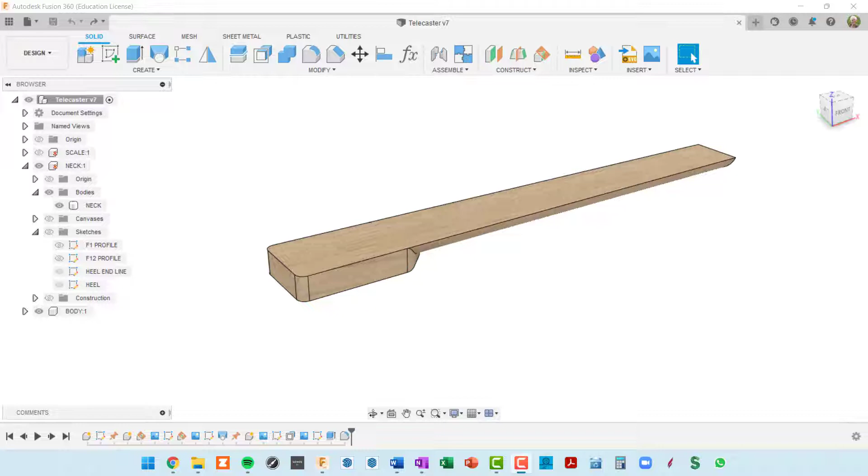In this video, we'll create a smooth transition from the heel to the neck in this area right here. I'm going to use a technique I call draped line lofting. This technique was pioneered by Brad Anderson, and I'll leave a link to his video in the description below.

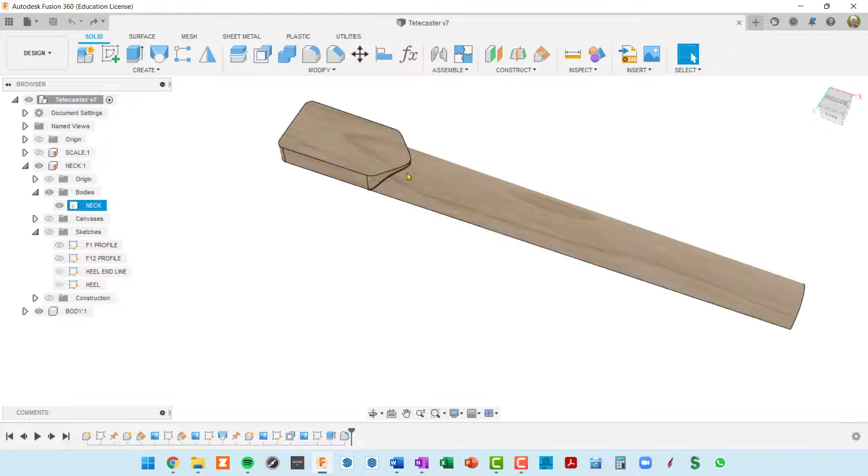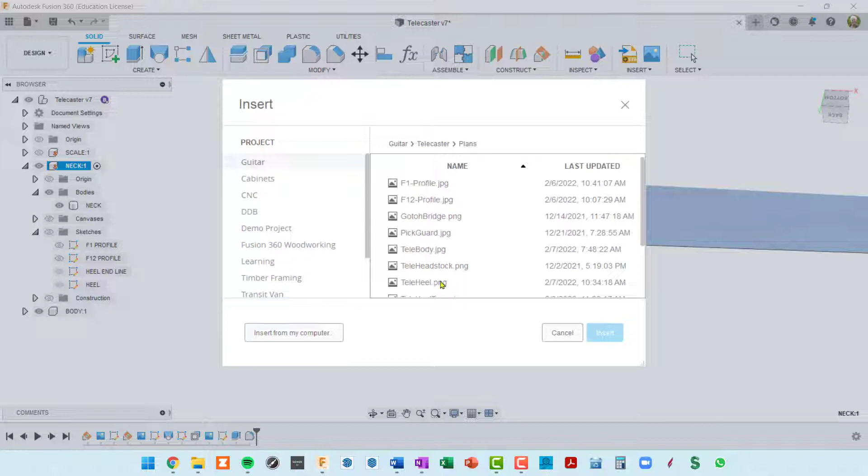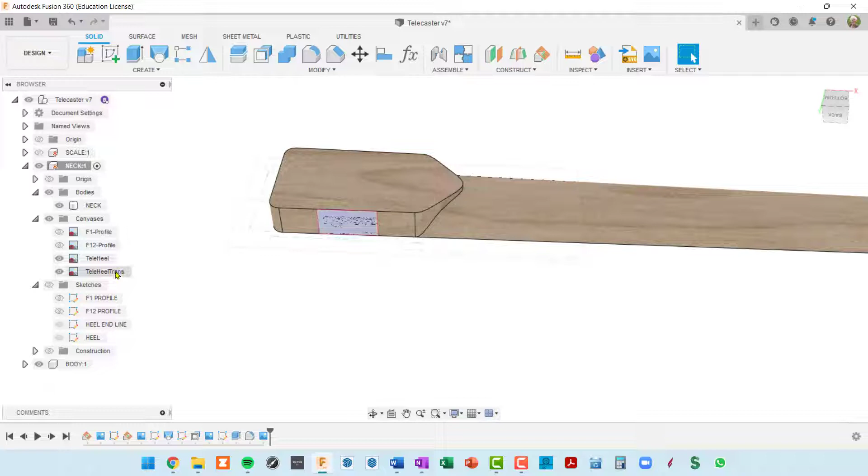The first step is to identify a transition point - where does this transition end on the neck? To do that, I have a piece of the plan as a canvas. I'll activate my neck component, go to Insert Canvas, find my plan file, Tele-heel trans, and insert it onto this plane. I'm getting an error that the canvases are hidden, so I'll unhide that and confirm. Now I have a new canvas, already named based on the file name, Tele-heel trans.

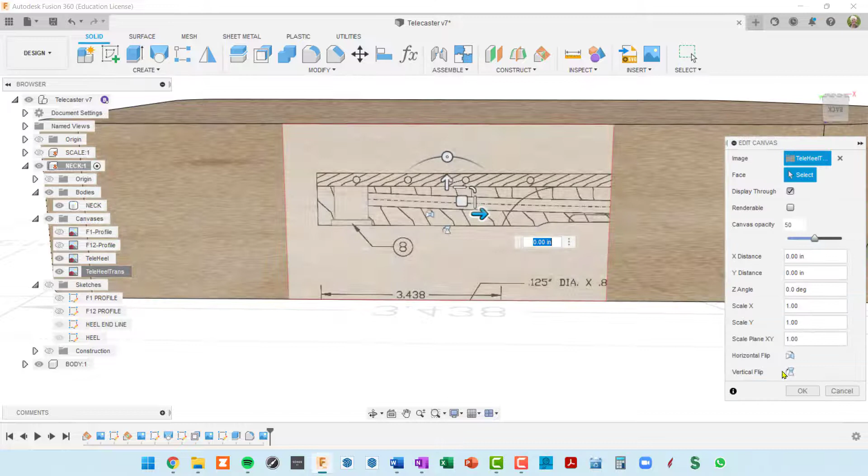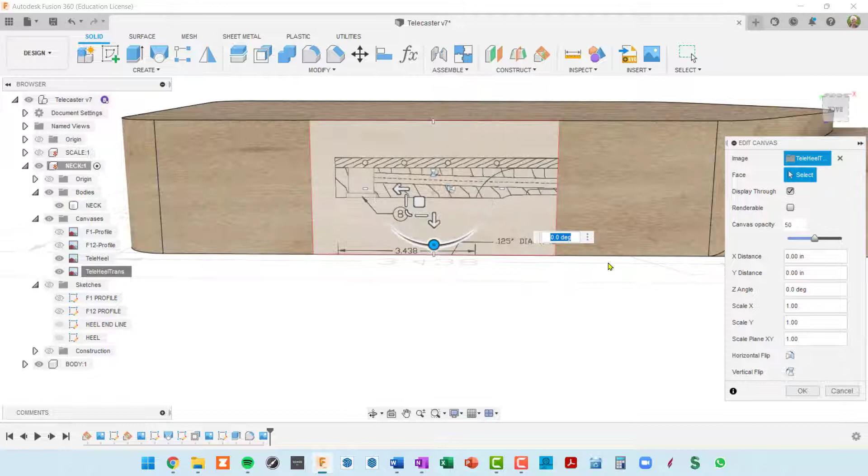Let's zoom in - you can see it's actually upside down. This is the top of the fretboard, and this is the transition area. So I'll right-click on the canvas, edit it, and flip it horizontally in the dialog box. Actually, I want to rotate it 180 degrees, then flip it horizontally - but that's now upside down from what I need. Let me flip it vertically instead. Okay, that's what I need - this transition area needs to match the heel.

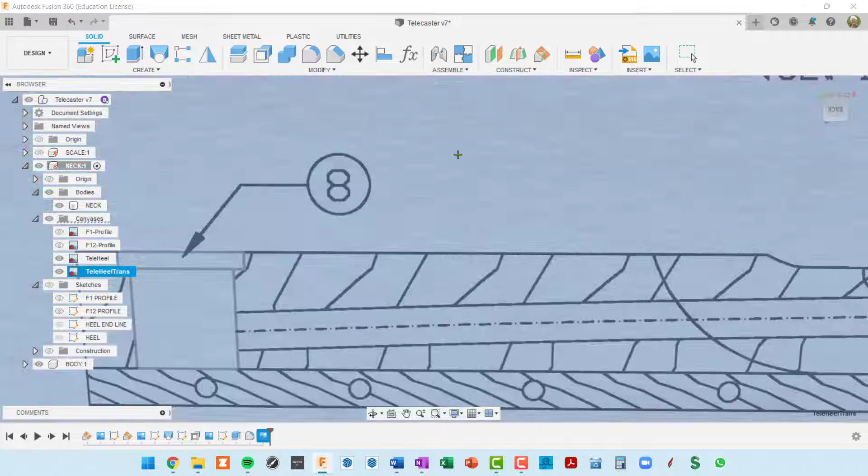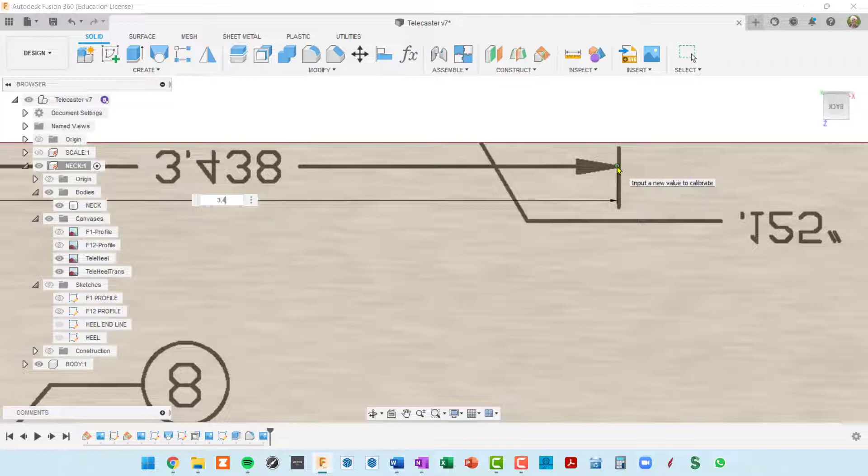The second issue is this is way too small. I'll click OK, then come back in, right-click, and do a calibrate. I purposely left a dimension in here, even though it's inverted and upside down - I can still read it, it's 3.438. I left that in specifically for calibration. So in the calibrate tool, I click here, move to the other end of the arrow, click there, and type in my dimension, 3.438. Now it should be scaled appropriately.

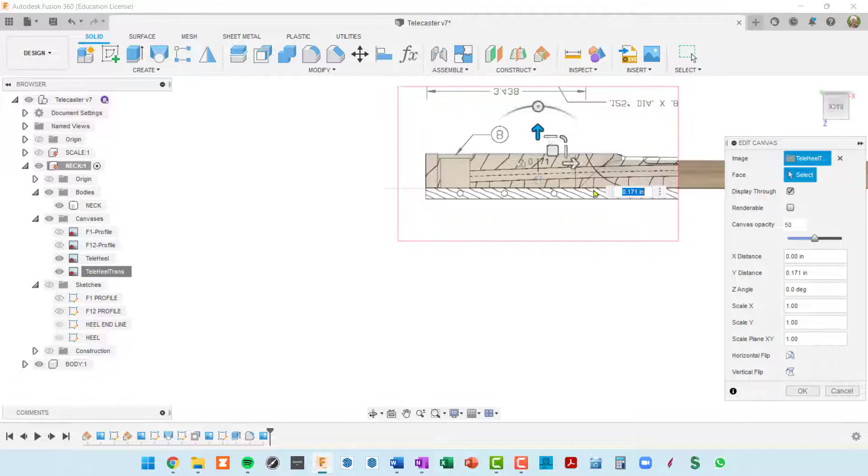Now we want to move it, so I go back in, right-click, edit canvas, and align it to the end, then move it vertically. Keep in mind we have a fretboard on top here, so I'll align the bottom of the fretboard to the top of the neck. Now you can see we've scaled this up, and we have a transition point, which I'd say is right about here. I'll OK out of that.

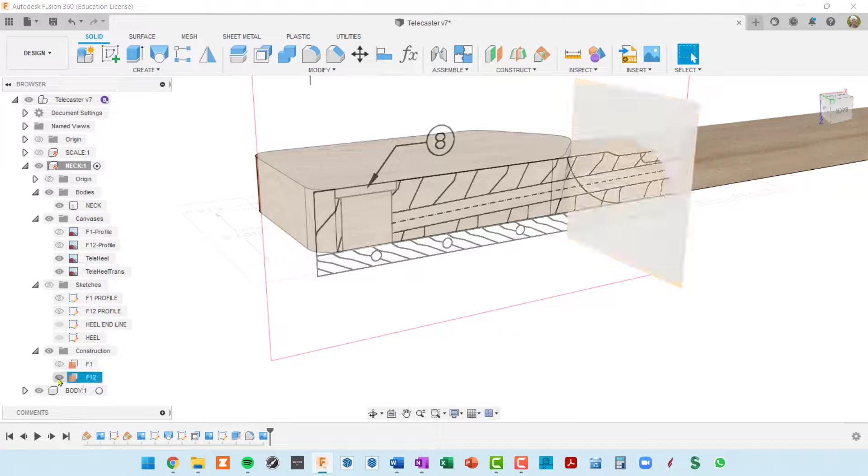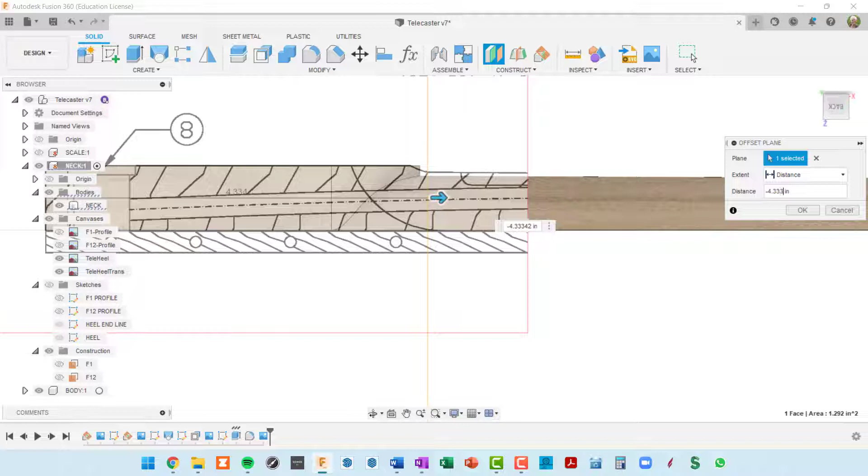Next I want to make a construction plane at the point where I think the transition stops - again in my neck component, that's where the plane will go. I'll unhide my construction plane folder, hide fret 1 and fret 12, and create an offset plane, offset from this plane at the end of the heel. I'll push this in and look at the side profile to manually move it to where I think the transition stops. I've got a value here I'll round up to 4.333 - we'll make it 4 1/3 inches from the end of the heel.

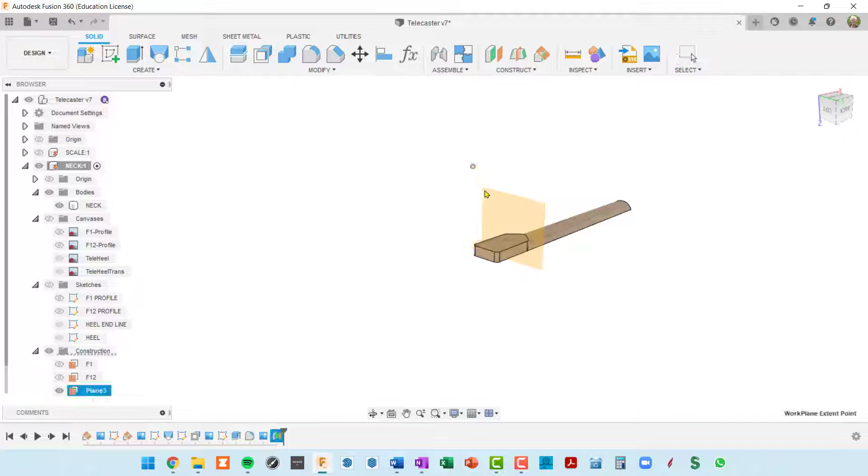Now that we have that, we don't need the canvas anymore, so I'll hide all the canvases. A word about these construction planes - they can actually be resized, which has no effect on their functionality at all. You can see I'm grabbing a corner, or an edge, and resizing it. I find that kind of handy - it's easier to work with them if they're not huge, just tight around what you actually want to use them for.

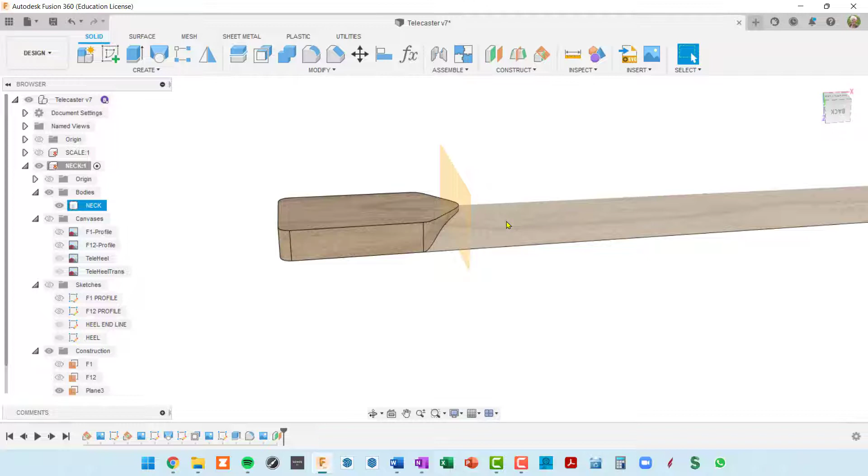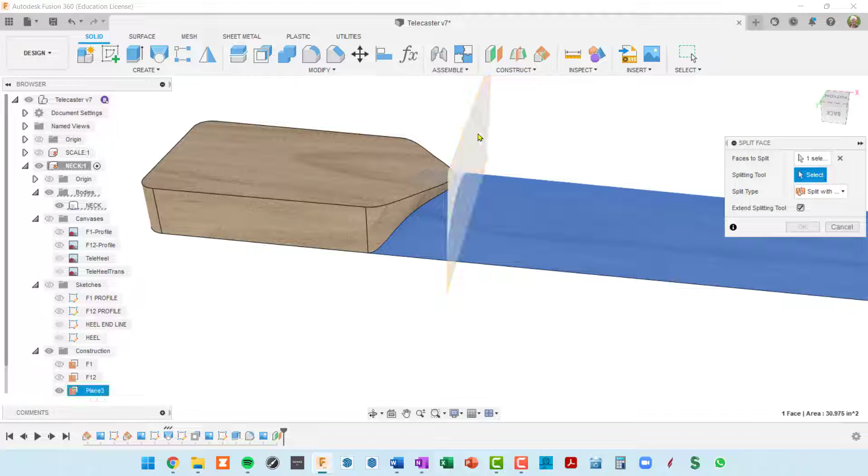We want to use this plane to create a line on the neck that we'll eventually use with some splines for this lofting technique. I'm going to use a feature called split face, and this neck area is what I want to split. The splitting tool, which I'm selecting now, is the construction plane. If I OK out of that, I can actually hide my construction plane now.

I don't need that anymore. And I've established the transition point, the end of the transition, essentially.

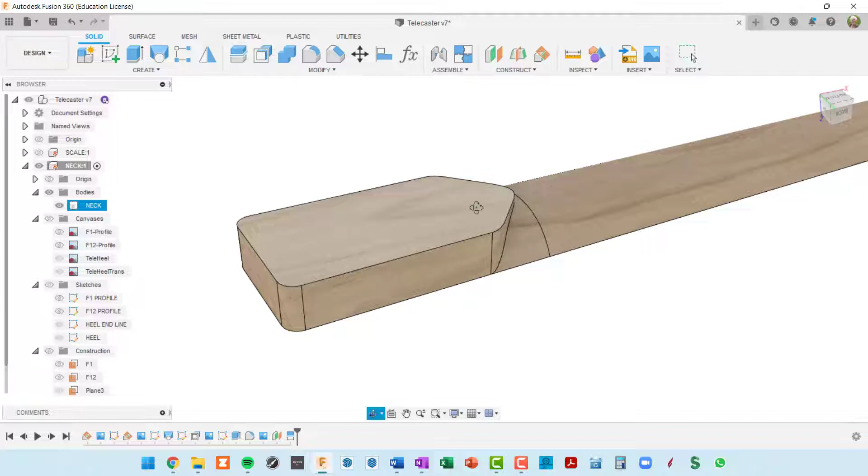OK, so the next step is to create a series of lines that are evenly spaced on top of the heel, and then use a project feature to drape them down onto the neck.

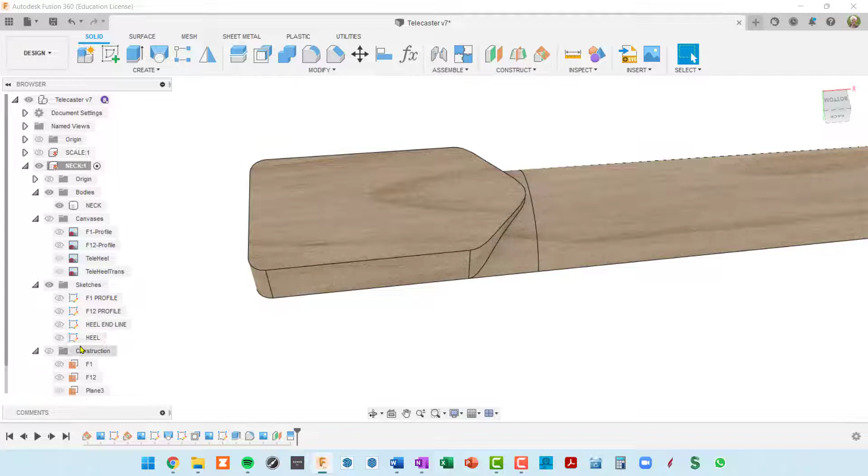So in order to make the lines, we'll make a new sketch. I'm going to unhide my sketches here, the main level folder, but I'll hide the other ones. And you know what? I'm actually going to show my heel sketch because that's what we want. I've got a rectangular heel sketch here that was used to make the entire heel before we did this edge fillet. So let's make a new sketch.

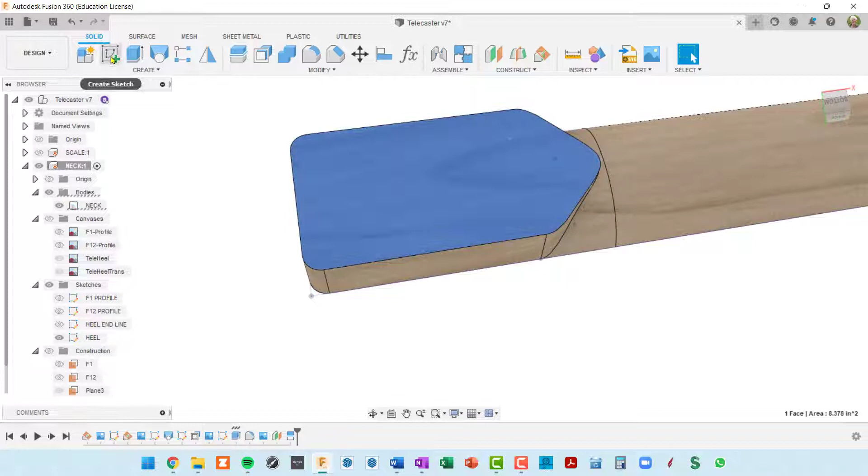I'm going to pre-select this surface right here and go to create sketch. And now I need to make these lines essentially on top of this heel.

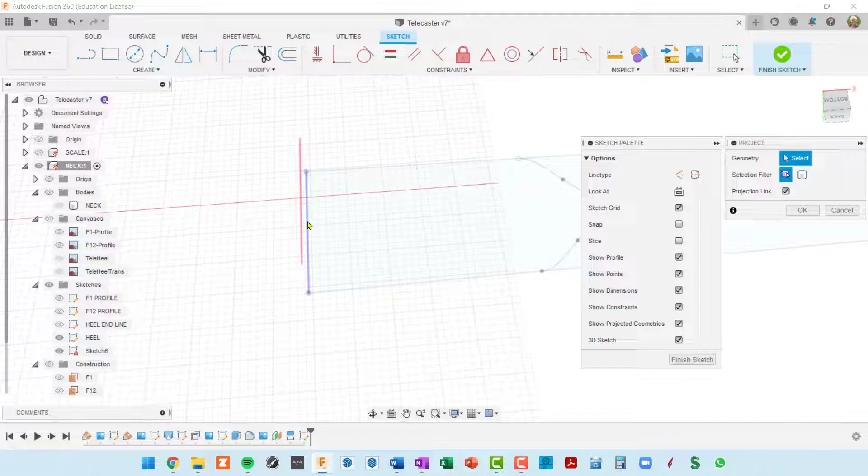So in order to do that, I'm actually going to hide the body, it's kind of getting in the way now. But I want to use these lines, which are coming from another sketch. So I actually have to do a P for project. And now I'm going to select the geometry that I want to project into the sketch that we are inside of right now. So I'm clicking on all of these lines here, and I'll do an OK. And now we can hide that heel sketch.

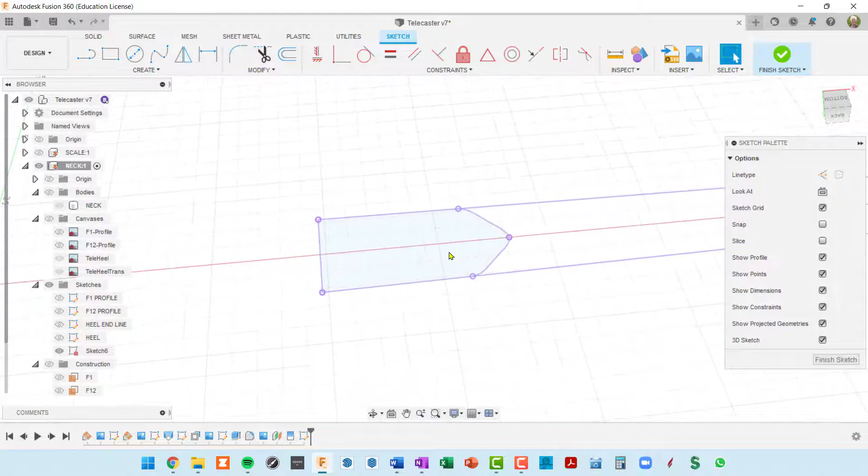And this is the sketch we're working with. So this is what got projected in, which is essentially the outside of the neck, but it doesn't have the round over on the end. So now I want to create these 5 lines, and I can do it right inside this sketch.

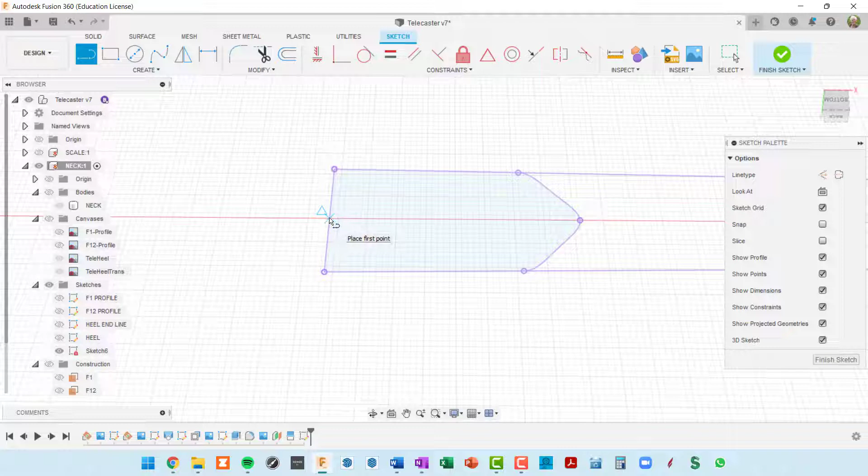So I'm going to click on my line tool, and I want one right down the middle. So I am just hovering over this end line until I get the triangle, which designates the midpoint, and then I'm going to move out. Now you see that I get this little triad here. The reason I got that is I was in 3D sketch mode.

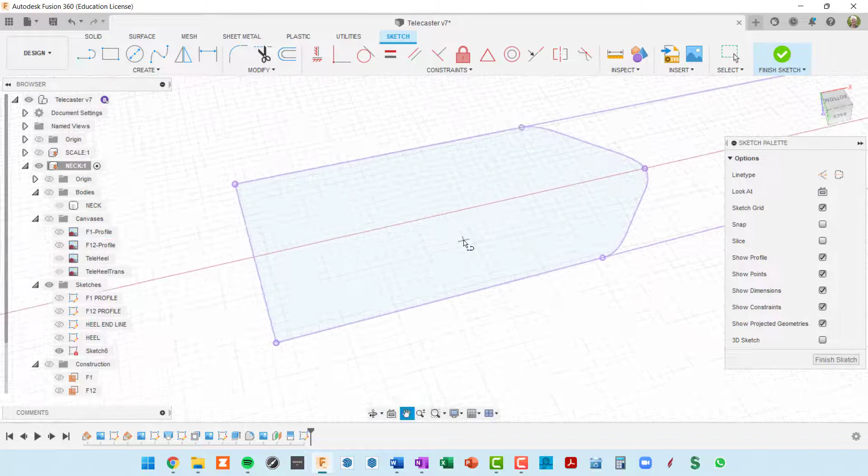So I'm going to switch my tools back and forth, which if you toggle in or out of 3D sketch mode, you have to do that to get it to go back to the regular mode. We will be using 3D sketch, so I'll explain that in a few minutes.

Okay, so I'm going to start with a line here at the center point, and now I can go to this point, but I want to go beyond because I'm going to drape these lines beyond the transition point. And I guess it would be a good idea to actually see that transition point again.

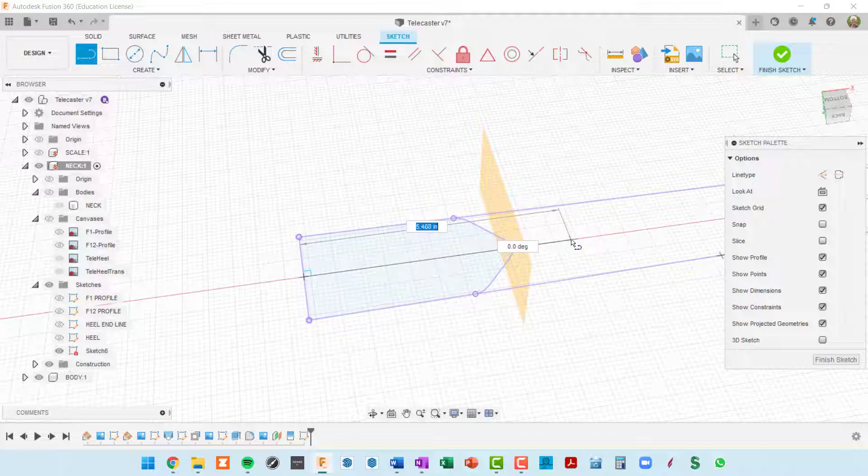So let's go and turn our transition back on in the construction folder. Okay, so as long as I go past that, we're good. And I'll accept that line.

These 2 outside lines are easy enough. I can conform to the outer line on the edge of the neck. And here's a 3rd line. I'm clicking here and I'm clicking there.

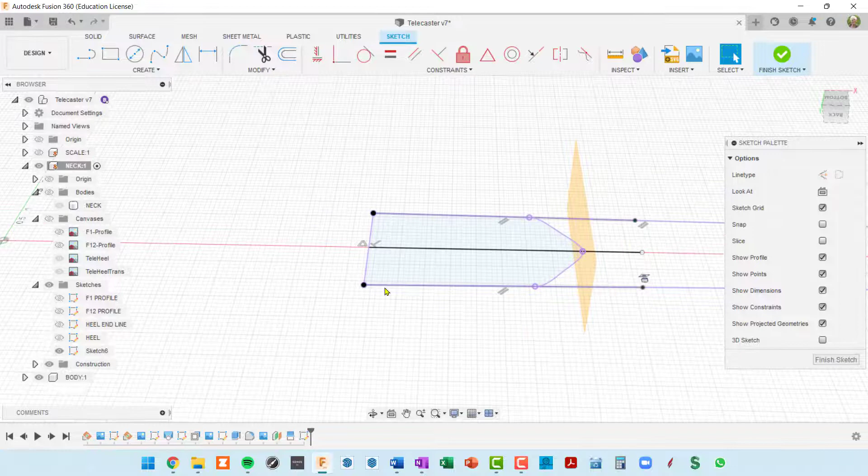Okay, so now we want to do 2 lines kind of inside, midpoint of those 3 lines that we just did. The first thing I'm going to do is align these 3 points. So let's look at this straight from the top.

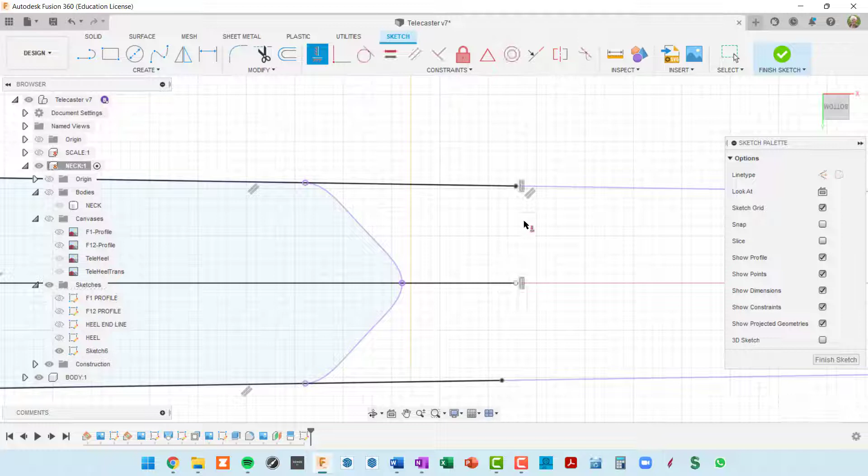And I will get my horizontal vertical constraint. Click on one point and the next. And now you can see a constraint pops up. Then I'll click on this point and the next. Now all 3 are vertical.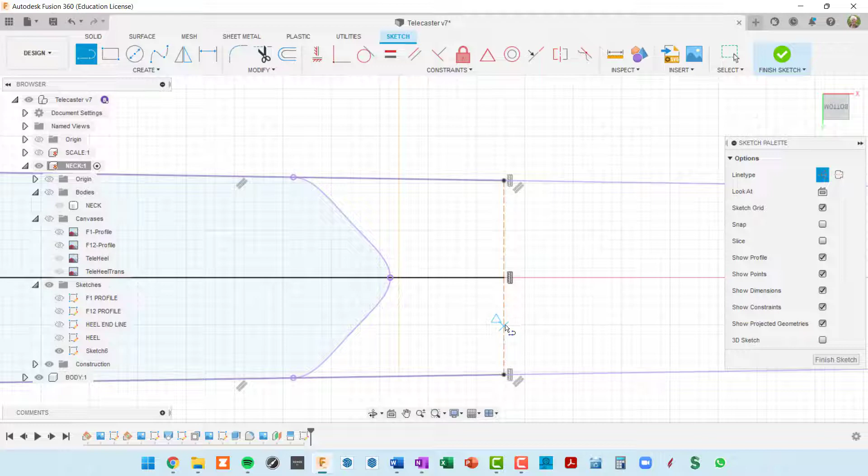And the reason I did that was I'm going to go to my line tool and turn on construction. And I'm going to start specifically in the center and go up to this point and then do another line from the center out. And the reason I'm doing that is now when I hover over this line segment, I'm getting a midpoint, which is what I want.

I also want a midpoint over here, and I'm not seeing one. So I'm going to make the same construction lines from the midpoint to the outside. Okay, so now I should get a midpoint here and a midpoint here. So that's all I need to make this line.

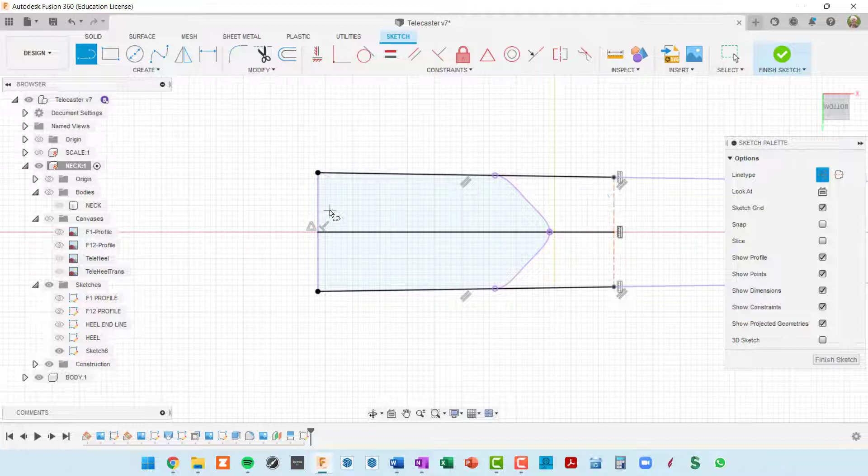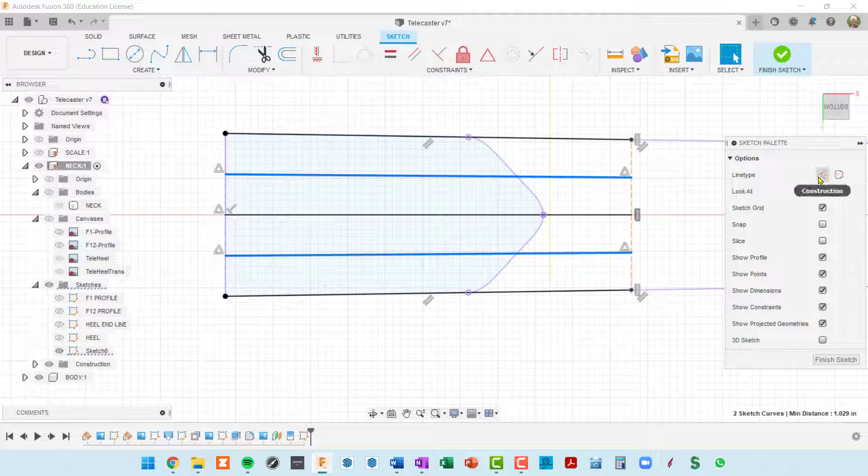And again, midpoint here to midpoint on this construction line. And the only problem is I was in construction mode. So I'm going to hit escape to get out of my line tool. And then I'm going to click and shift click on these two lines and turn off construction, which you can do with an X shortcut key, or you can click on this in the dialog box.

So I now have the 5 lines. They exist in a sketch. So I'm going to finish my sketch. And let's go ahead and turn the neck body back on so that we can see what's going on here. So we have 5 lines hovering above the neck.

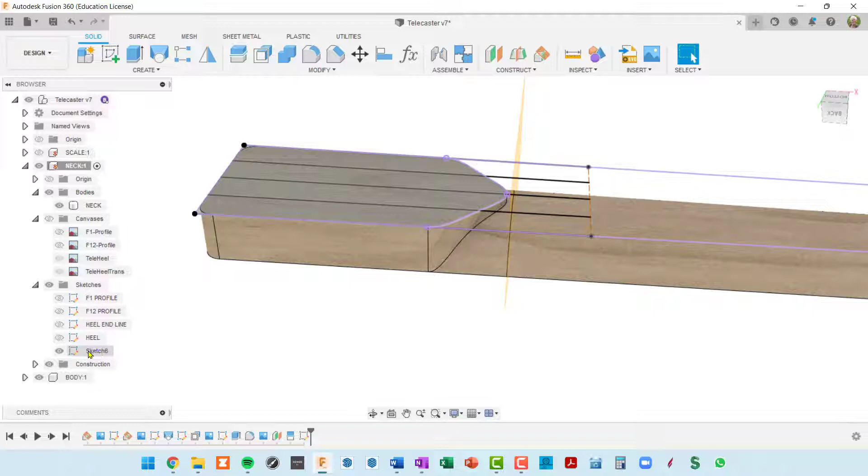And now what I want to do is I want to drape those lines down onto the neck. I actually have to do this in a new sketch. So let me rename the sketch that we just did. I'll slow double click on it, and I'll call this heel lines. Those are our trans lines.

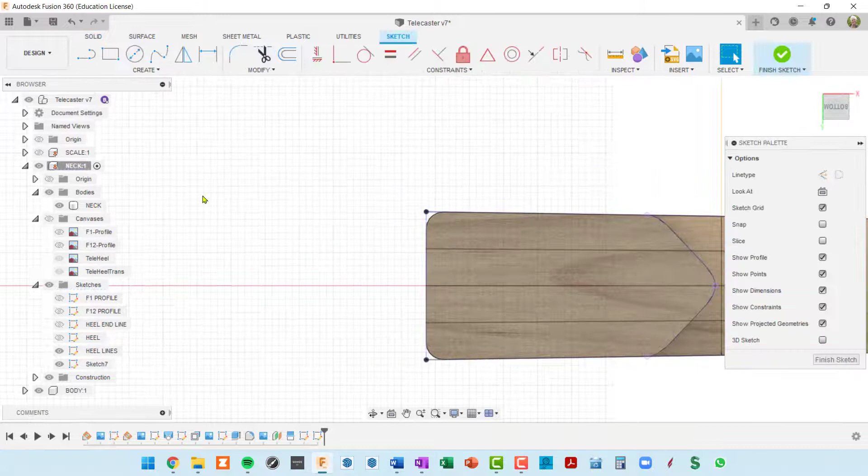Okay, now I'm going to make another sketch. This is actually going to be what's called a 3D sketch. It doesn't matter what plane is selected. I think this is the plane that got selected, but it really doesn't matter because we're going to be doing kind of a 3D operation. We're going to drape these lines down onto the neck.

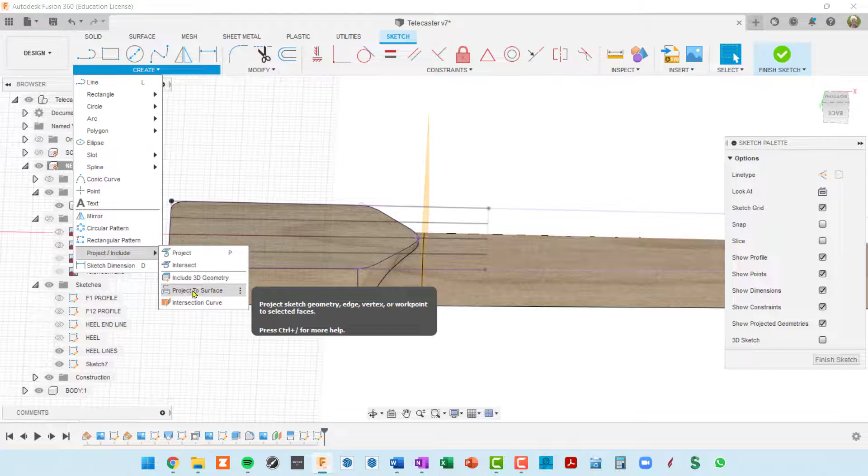So I'm going to go into my Create menu and go down to Project Include, then down to Project to Surface. In this dialog box, the first thing it asks you for is faces. So I want the heel, and I also want the neck, and this portion of the neck also. So those are the 3 faces that I want to drape to.

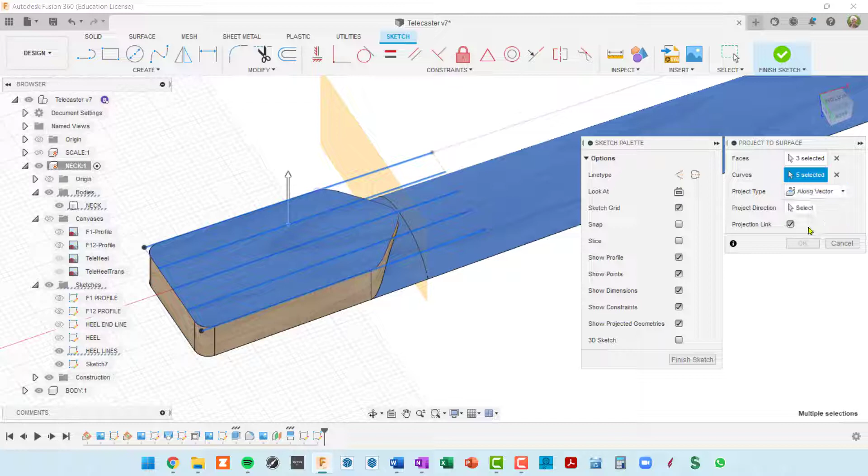Now I have to select my curves, which are my 5 lines. So I'm clicking on all 5 lines, and I've got 5 selected here. My projection type is along vector. I want to project it straight down. So I also have to select a projection direction, despite the fact that it's already got an arrow pointing in the right direction. But anyway, little oddity in Fusion. Okay, now I've got my projection direction selected.

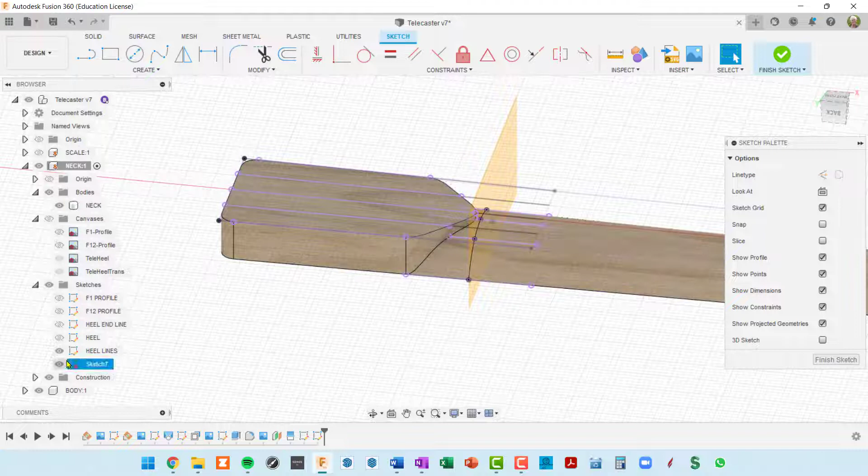I can now do an OK. And if I hide this heel lines, what you'll see is the new lines got projected onto the top of, well actually the bottom of the heel and onto the bottom of the neck here. So let's go ahead and slow double click on that, and we'll call this heel lines projected.

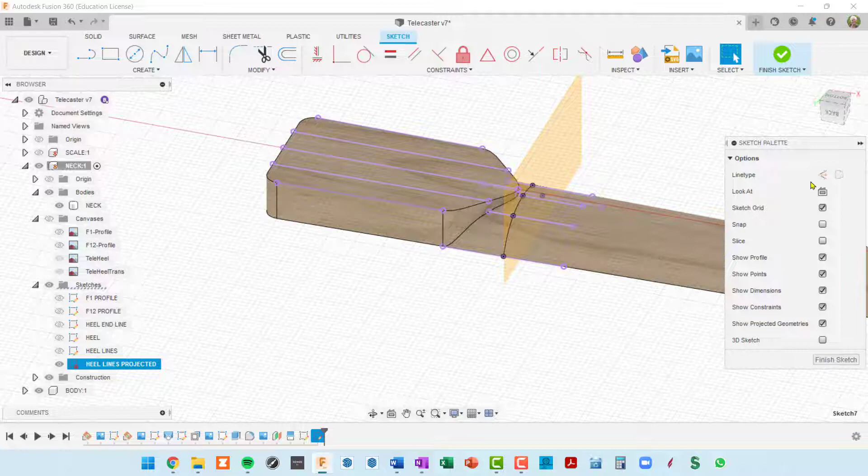Now, the purpose of projecting those lines is really to get these points right here on the neck. So, in this same sketch, what I'm going to do is first turn off our construction plane, get that out of the way.

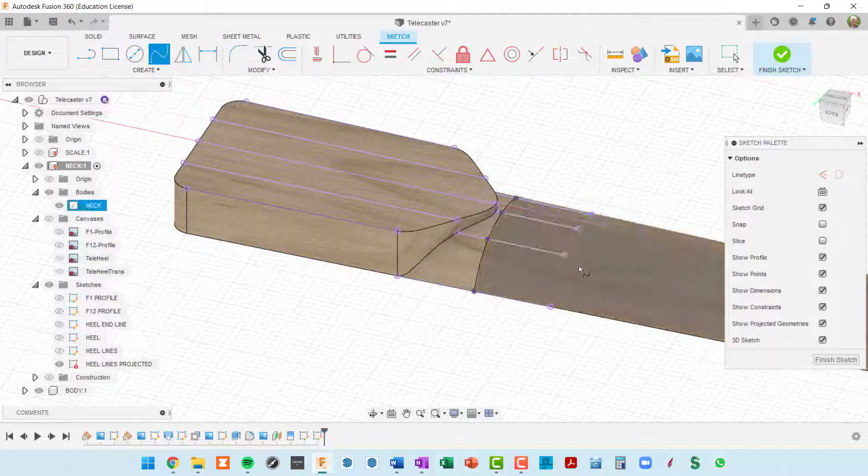I'm going to use a spline tool, but I'm specifically going to go into 3D Sketch. Let me toggle between tools so that 3D Sketch enables itself. Because I want to go from this point to this point and this point to this point. So I'm not working on a plane, I'm working out in 3D space. But I still want to be very careful that I get an intersection here and an intersection here.

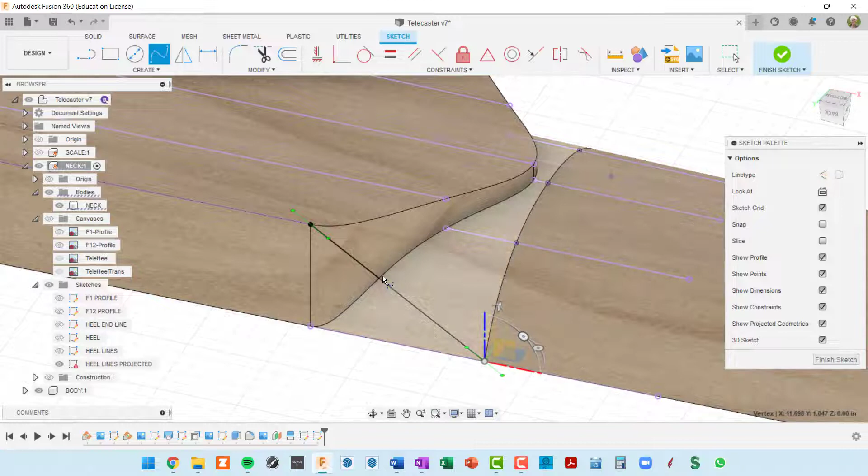Okay, and then I can click on the check mark. So right now these splines are straight, but we're going to make these tangent to the neck. One side of it's going to be tangent to the neck. So we'll come back and do that next. But first I want to be real sure I intersect here and intersect here, and then hit the check mark.

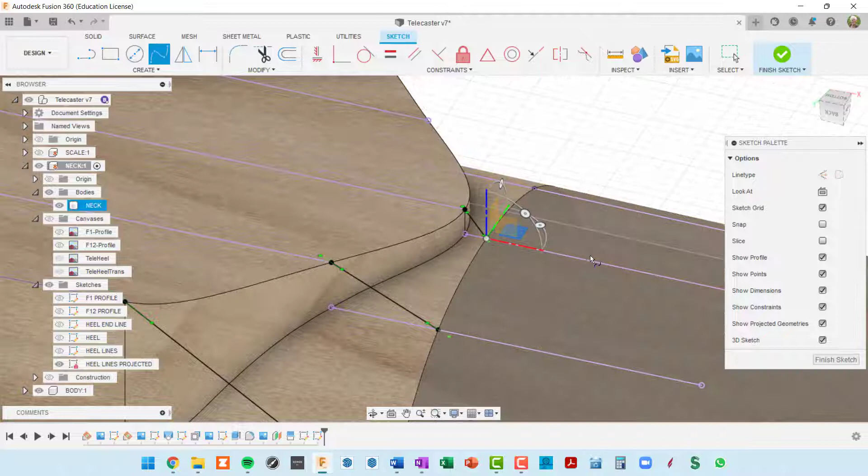Okay, so we've got to connect all of these points. That's the third one. I'll orbit over to the other side. Doesn't matter which side I go from. Hit the check mark there. And here's the final one. All right, so now we have these 5 splines, which are basically just straight lines right now.

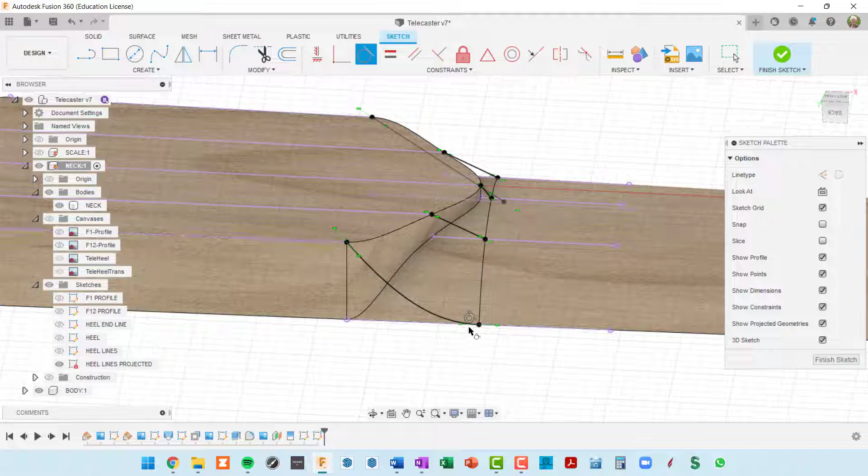But I'm going to go into the tangent constraint, click on each one of these lines, and then click on the extension of that line on the neck. And you see we got a nice transitional curve there. So again, I'll do that here, click here and there, then click on this center line and the center line extension.

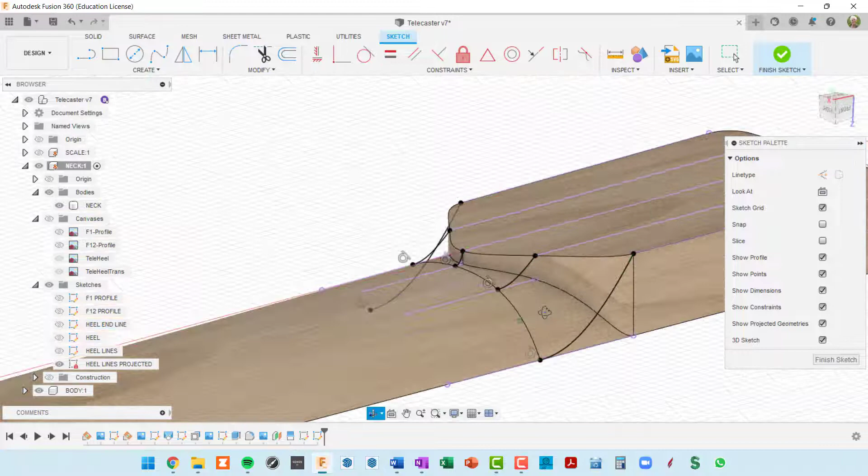Come around to the other side. I'll click here and its extension, and then click here and its extension. So now we have, if this was filled in, you can kind of anticipate what this transition is going to look like.

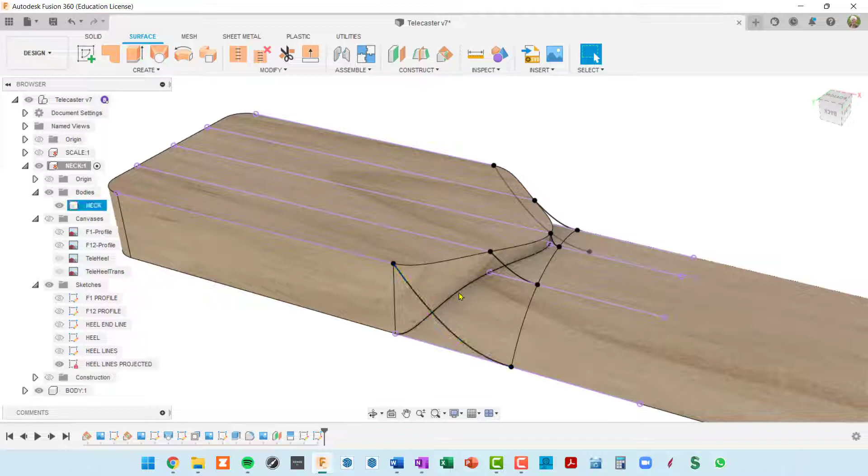So at this point, we can get out of the sketch, and I'm going to go to my Surface tab now. What we're going to do is a surface loft. It's not a 3D body, it's just a surface, but it's going to conform from this line to this line. So I go to my loft feature.

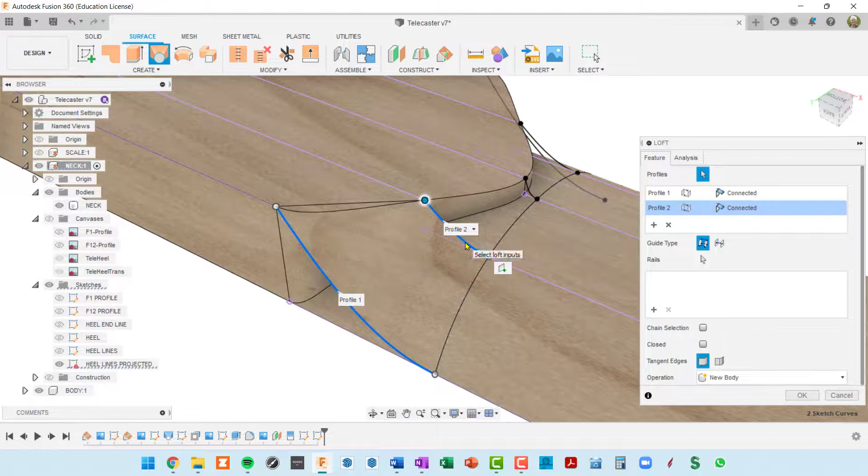I'm in my profiles here. So I'm going to click on this line and this line, and you can see it sort of filled in, but it's a little bit improper right there, but we're going to fix that. We're going to come back and add some rails. So I'm going to click on the next profile, which is right here, and then the fourth one, and the fifth one here.

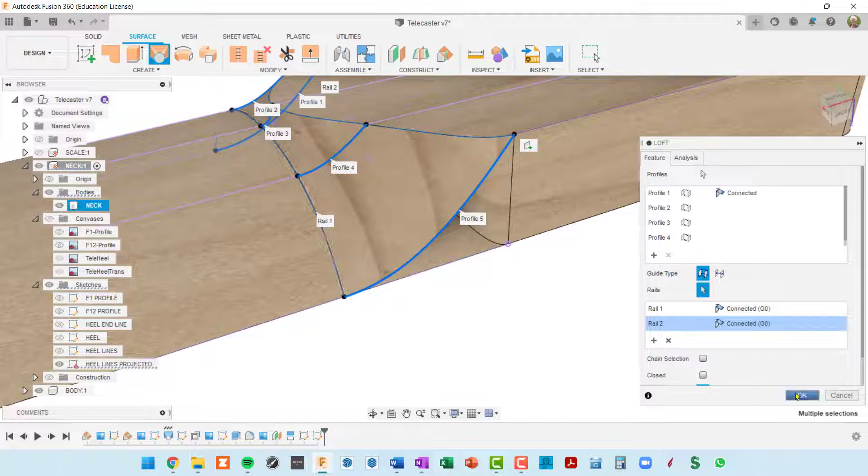Okay, so you can see that we've kind of got it filled in. Now let's go down to the rails, and the rails are this rail right here, and I think we might have to do this in two pieces. We have a curve here, which is actually generating an error, but I think that's going to go away if we click on the other side as well. And it did. Okay, so now you can see we have filled that in, and it's a very nice transition from heel to neck. So I can do an OK to get out of that dialog box.

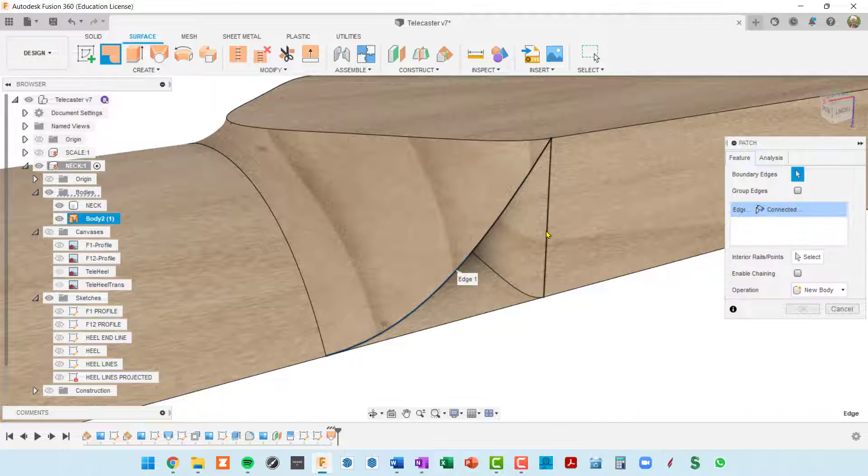And now we're still in the Surface tab. We have some open areas here, so these can be patched. I'm going to use the patch tool, and I'm going to make sure enable chaining is turned off, and I'll click here, here, and here, and you can see that filled in.

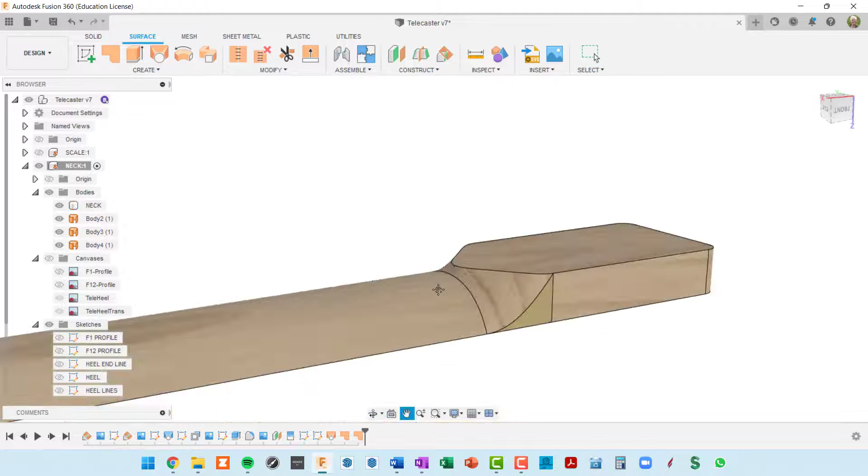So I'll do an OK, and then I'm going to come around to the other side and do the same thing: patch, and select these three lines. Doesn't matter what order you do it in. And click OK. Now you probably noticed on this side that it's not the wood surface.

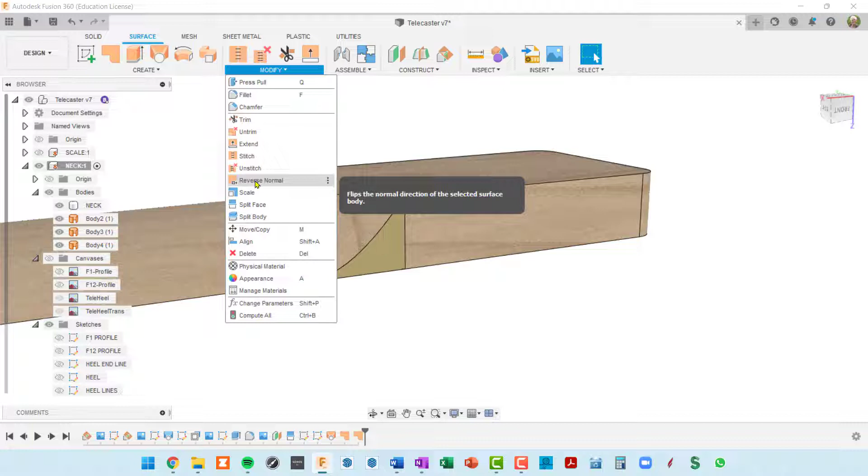If that bothers you, you can go to Modify and Reverse Normal. It's going to flip this surface so that it's showing wood on one side, and this orangey color on the other side is supposed to be the interior. So I'm going to reverse normal, select that surface, and do an OK, and now you can see that is our wood grain.

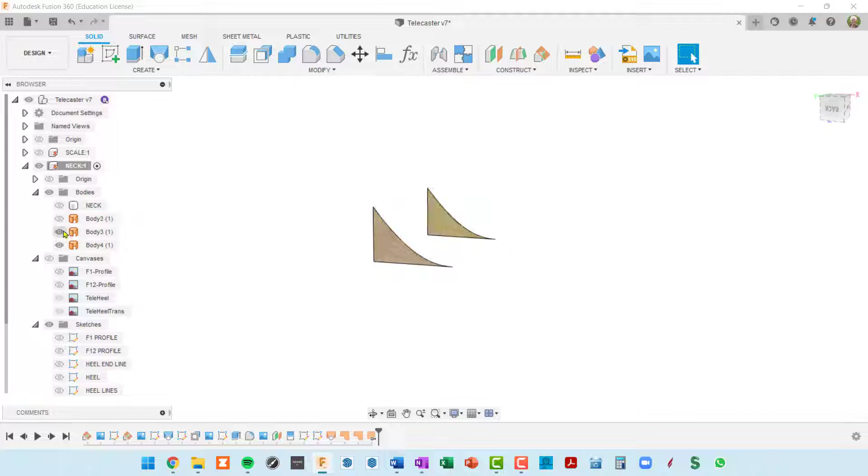Okay, but this is not a solid model. So if we go back to our solid tab and look at our bodies, we've got a neck body, and then we've got these other three bodies, which are all surfaces. They're not solid. So I think the first thing I'm going to do is stitch these all together so we just have a single body.

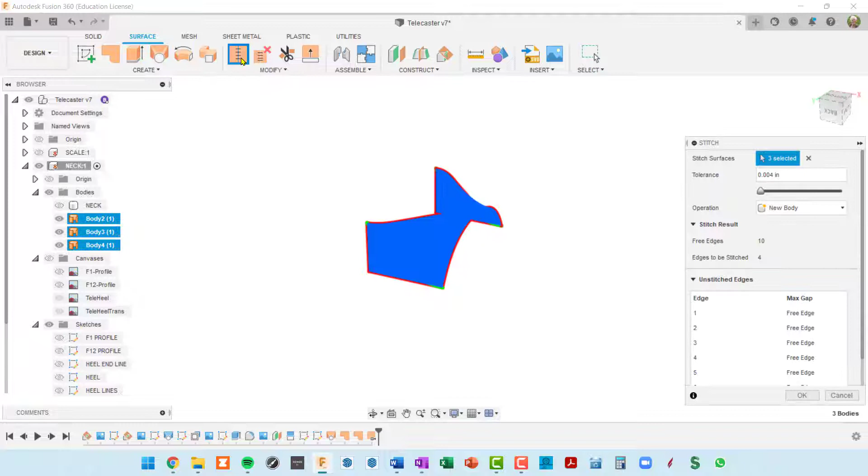Back in the Surfaces tab, I'm going to do my selection through all three of those, and you can see in the browser that all three are highlighted. Then I do a stitch and an OK, and now in the browser you're seeing there's a single body. It's still a surface body, but it's just one piece now.

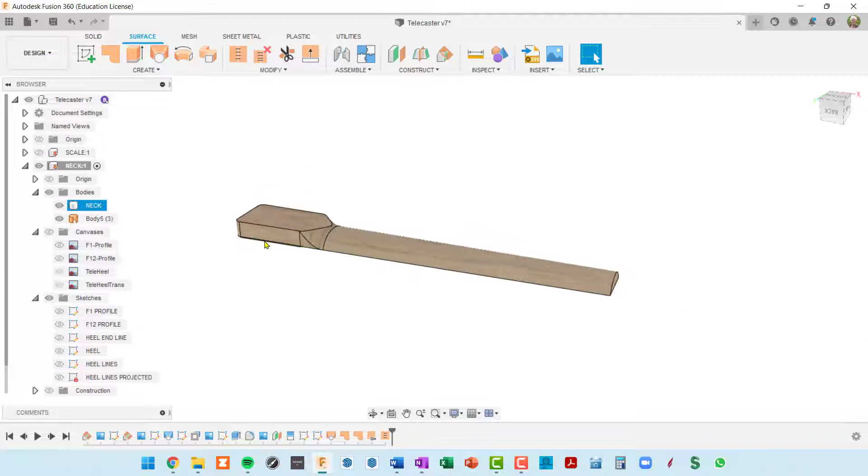It's stitched together. Now, if we turn the neck back on, the question is, how do we make this into a solid body? The first thing I've attempted to do in the past is to stitch this, but if you do that, you get this red error message saying that this stuff cannot be stitched. So I'm going to cancel out of that, and you really have to understand why it can't be stitched.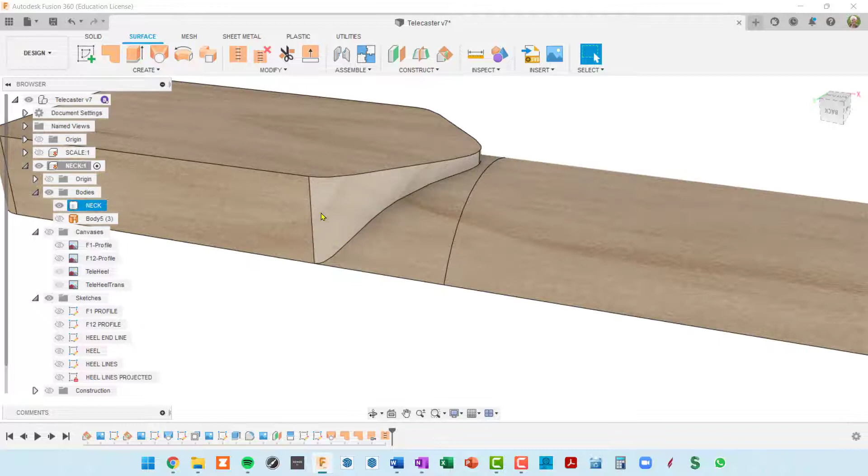If I hide that, you'll see this is all a solid body here. I can hide it and show it, and you'll see that's all one piece. So we have to cut away some of these surfaces so that we can attach the other surfaces to it, the surfaces in this body.

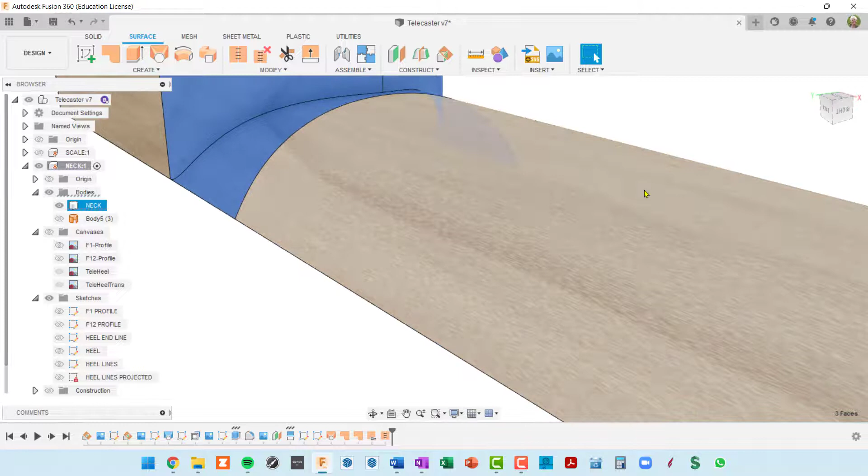So when I'm in the Surface tab, I can click here, here, and here — I'm shift clicking — and I can delete those surfaces and open up a hole in the solid body. So the solid body just became a surface body. If I hide the other piece, you can see now it's in a state that it can be successfully stitched.

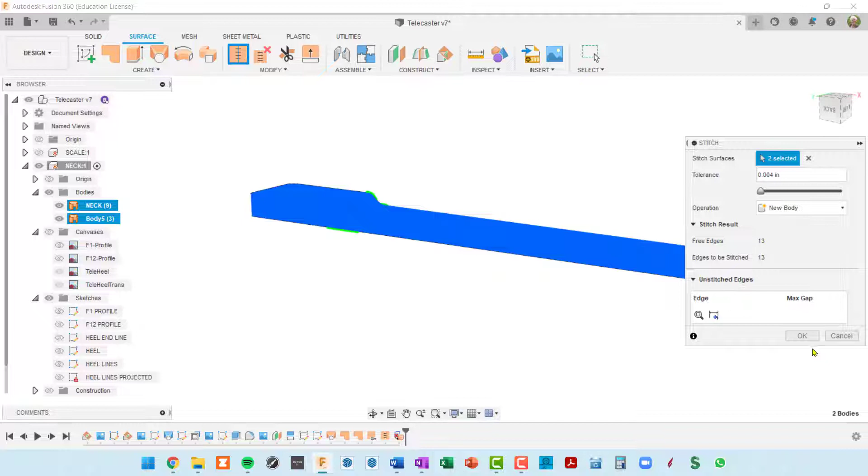So if I highlight all of that, basically I'm just selecting these two bodies right here, I will stitch it together. There's no errors showing, and now I have a single body. So I do have a solid body. I'll go back to my solid tab.

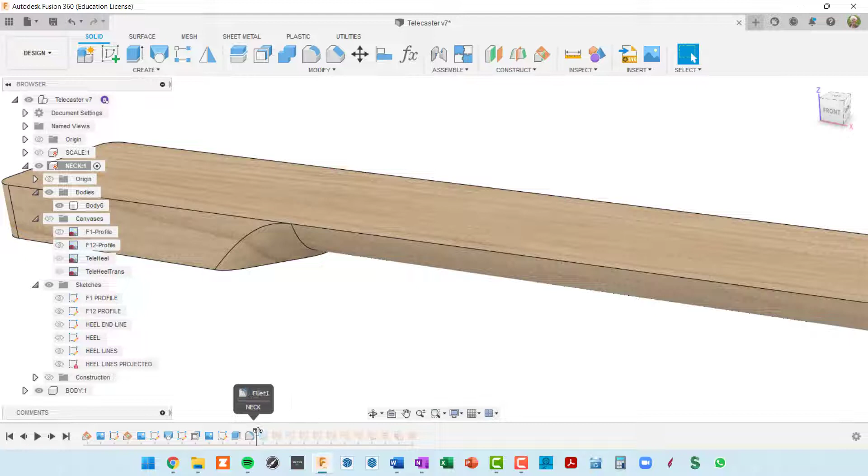So basically that is the transition. Let's do a quick timeline review. I'm going to rewind our timeline back to this point right here where we did our round over on the end of the heel. That's where we left off in episode 2.

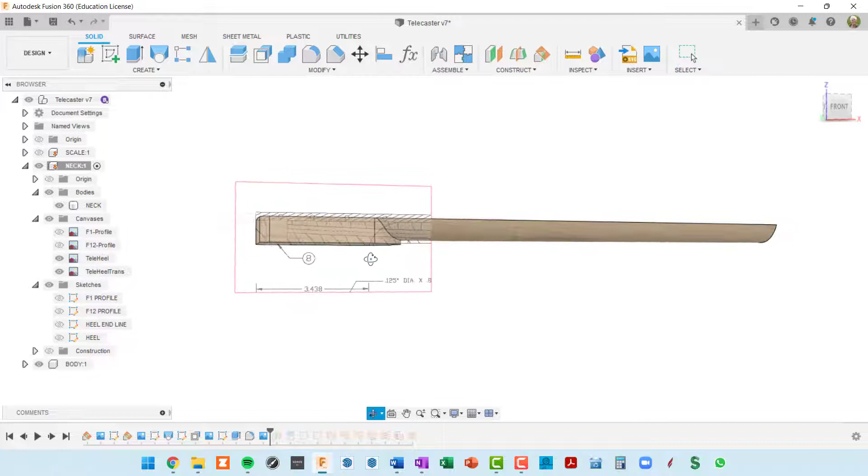So the first thing we did, let me show our canvases — we brought in a canvas, which is this side profile of the neck, and we positioned it and scaled it appropriately. That allowed us to identify a transition point, and we used that sketch to create a plane. Actually, I'm going to rename this — we didn't do that, so this timeline review gives you a nice chance to fix some issues. I'm going to call this heel trans, so we'll know what that is.

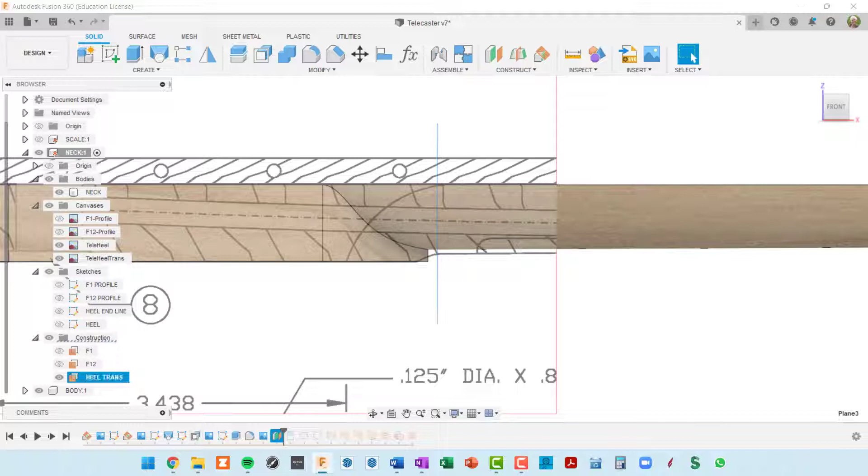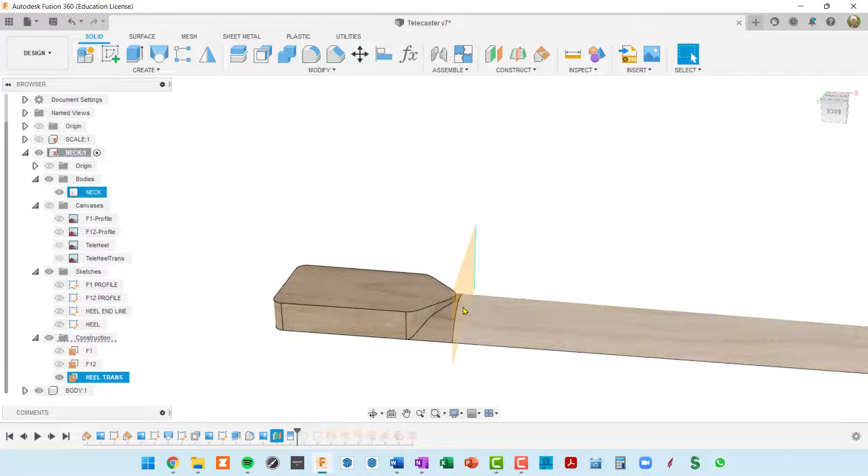Okay, so the next step was to create this transition plane, and then we actually used that plane. Let me go ahead and hide the canvas. We used that plane to do a split face, which essentially just draws a line on our face, but it drew it all the way across this profile of the neck. Let me hide our construction plane.

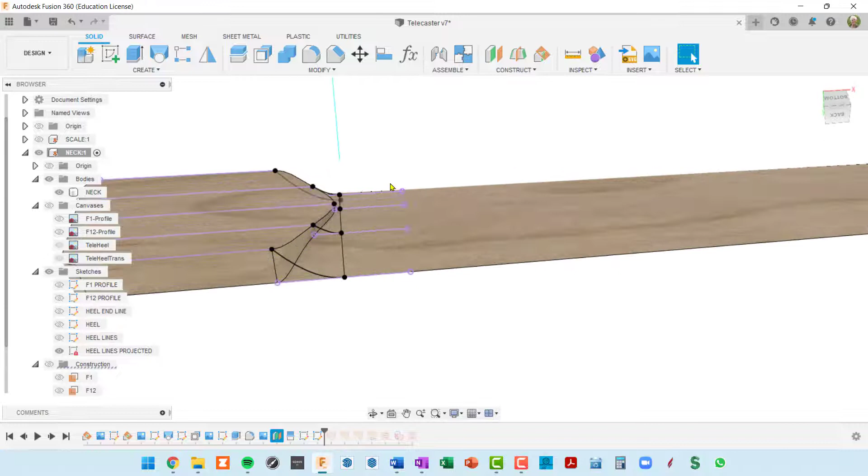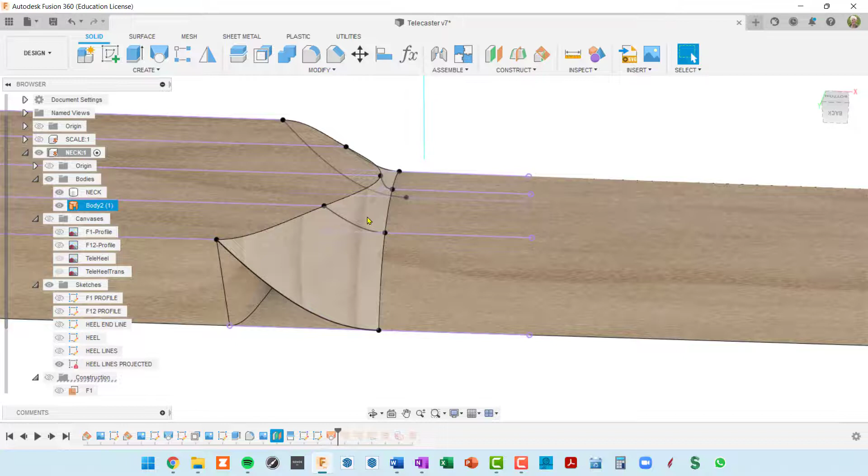Next we did a sketch that was 5 lines on top of the bottom side of the heel here, evenly spaced. Then we used those lines and projected them downward onto the neck, and at the same time we did splines to connect this transition endpoint to our heel. Then we went into the Surfaces tab, after making them tangent, I should say, and did a loft across all of these splines.

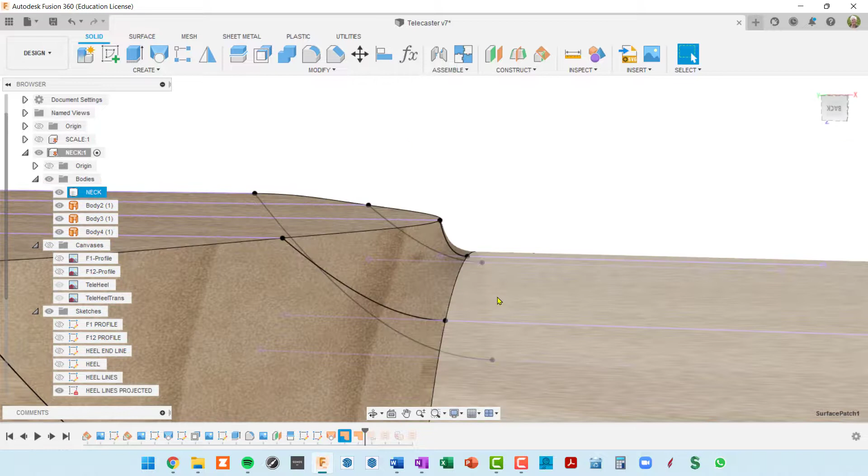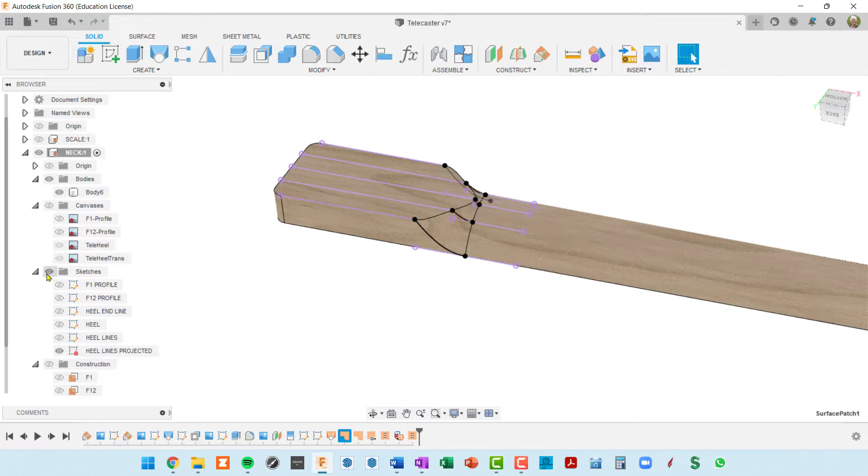And then did our stitching operation of the 3 pieces here. Oh, I'm sorry — we actually did this fill in, this patch of this side. Then we patched the other side, and then we did a reverse normal on this side to get it to look like our same kind of wood treatment. We stitched those 3 pieces together, and then we had to delete some of the surfaces on the inside of the neck in order to be able to stitch the whole thing up. And then when we hide our sketches, you can see that we've got our completed transition.